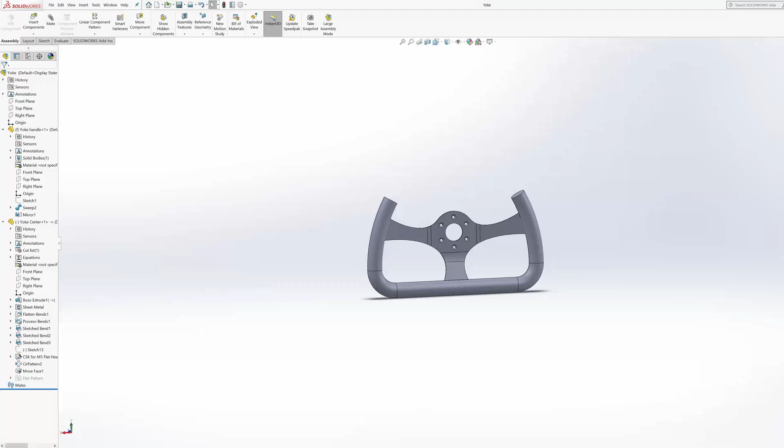First, I designed a yoke style steering wheel in CAD. I did measure the overall width that I thought I wanted, as well as a grip diameter. My initial thought was to make this out of steel tubing.

When you're drawing it up, make sure you use bends that are possible to bend. You'll see here at this corner, this has a radius that is too tight for any traditional bender. This other bend is so gradual it is also uncommon for traditional benders. So my thought was to get really thin-walled steel tubing so that I could try and bend it. You'll see that this creates problems later on.

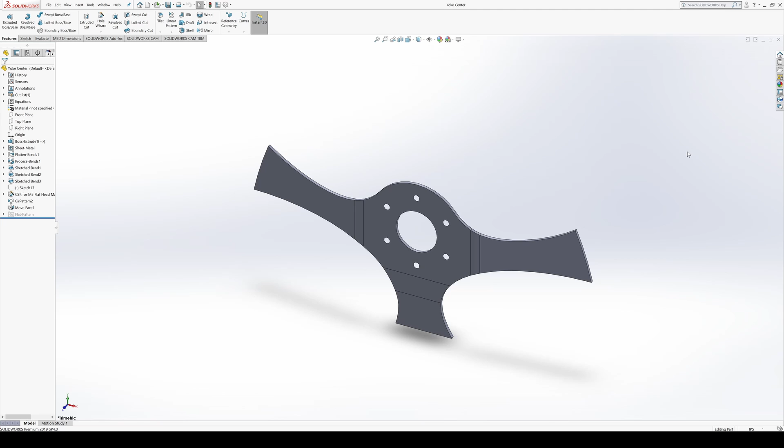The center webbing, I measured out the center hole spot as well as the screw locations to match up with my Momo style steering wheel adapter. I also put in bends. This will allow the steering wheel to project out, as many steering wheels do, and give the correct distance for things like turn signals. So I designed a part and had it made.

So we're doing some unboxing. This will be the center of the steering wheel. And I've got two, just in case I mess one up, which is likely.

All right, I'm kind of making a support block. I'm thinking that if I can hold the bar, so my first bend is gonna be right here. So if I can hold the bar steady, I'm gonna just kind of bend it against this. This will give it a little bit of support.

All right, time to try something ill-advised. So to make that bend, I tried just the lever arm and had somebody sit on the other side, and basically it's just not enough force to bend it that's not gonna work.

So my next thought is I'm gonna use these kind of like one of those 3-point bend things. So that middle one will be my bend block. These ones will support it. And then my thought is I'll just kind of lower the lift down with that bend block in place, and hopefully just the weight of the lift will kind of give enough to bend it.

Well, let's give it a try. Okay, I've got things roughly in place. I'm gonna lower the lift now and see if it'll bend at all or if we need more force. Yeah, not quite enough.

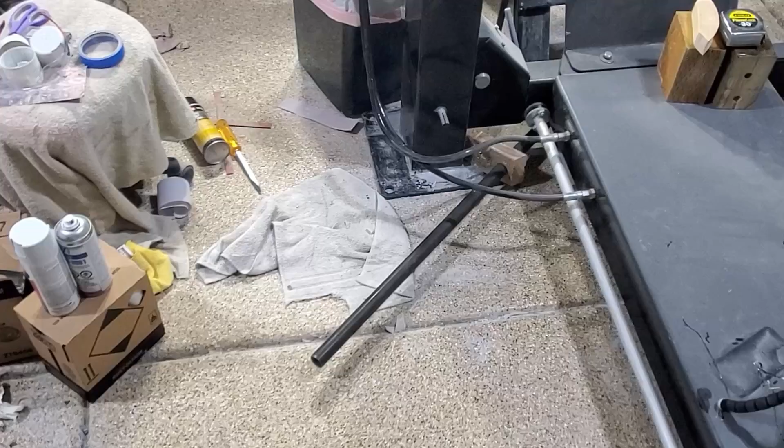Okay, this is attempt 3. I'm just using the floor and the weight of the lift to kind of keep things still, and then I'll see if I can move it or if it still kind of slips around.

Well, we just broke our wood, and even that, the column was twisting. So, I don't know, I'll keep thinking.

So this is the desired shape. And because I don't have a good way to bend this, especially these abrupt curves here, I'm gonna have to slit the tube into several sections and then kind of bend it and weld it back together. And I thought I could probably just do this gentle bend in some other fashion, but not finding that I can do that, so I think I'll just do the same thing here.

I made these paper templates to help me know what notch size I need to cut out. I then tape them onto my metal piece, and I space them so that this notch and this notch match up with my paper template here. So my plan is I will drill little holes here and big holes here, and then I will saw out and connect things.

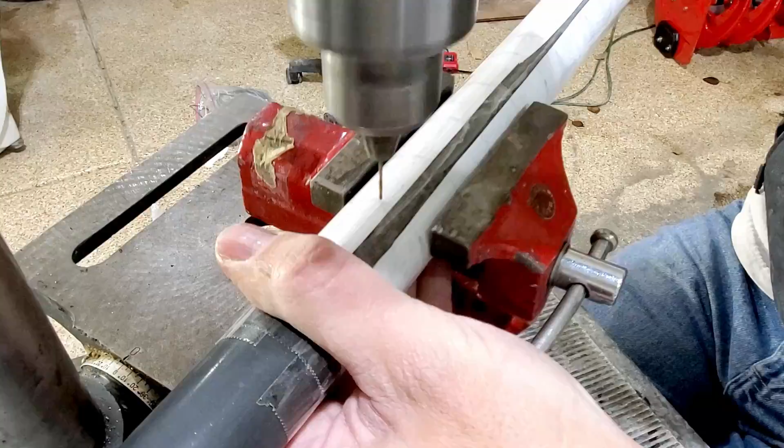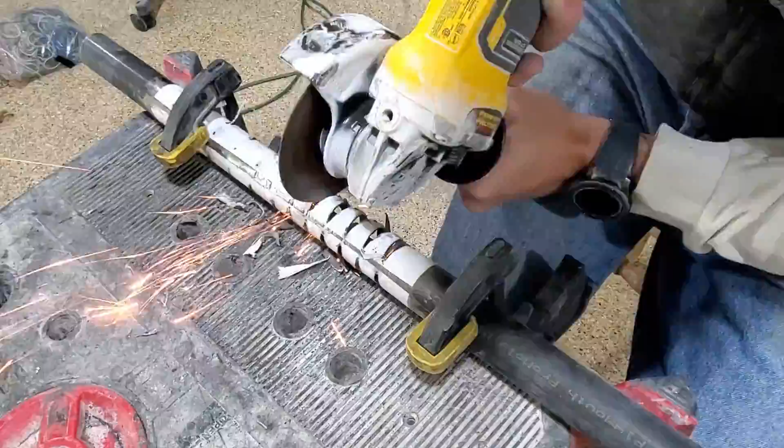Here we are with all the notches cut out. So let's see if this can go according to plan. We'll go ahead and bend this up and see if it roughly matches the shape we want.

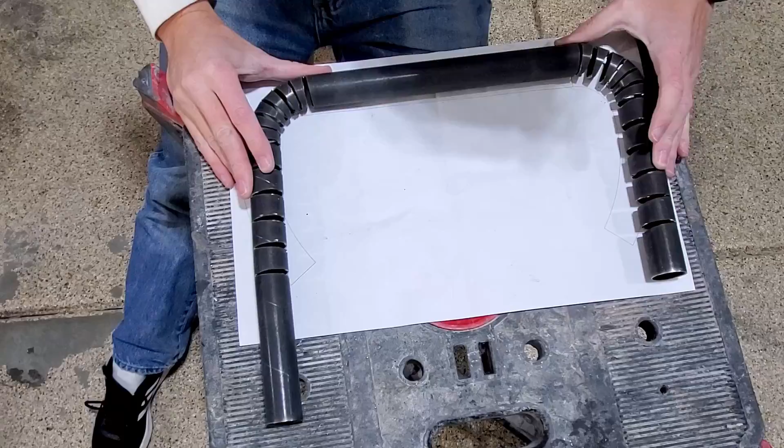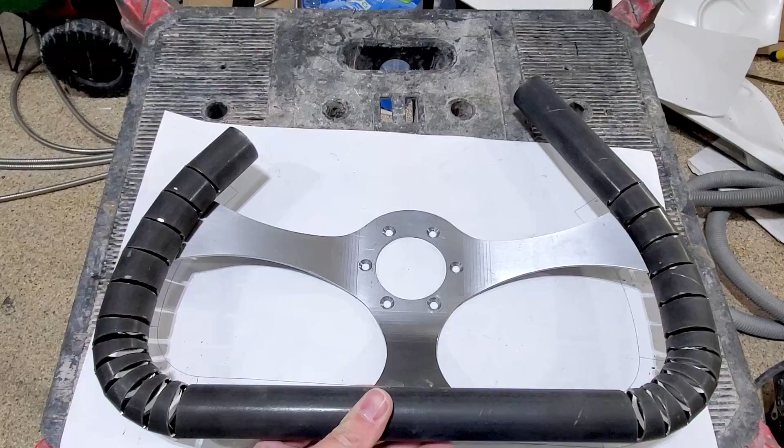So at this point, I'm realizing that my slots are too large. The reason for that is I did a 2D template onto a 3D tube. Although the template was at the desired angle, not accounting for the diameter of the tube resulted in having the slots too large. Well, it matches the pattern. The only thing is I made these slots a little larger than I desired.

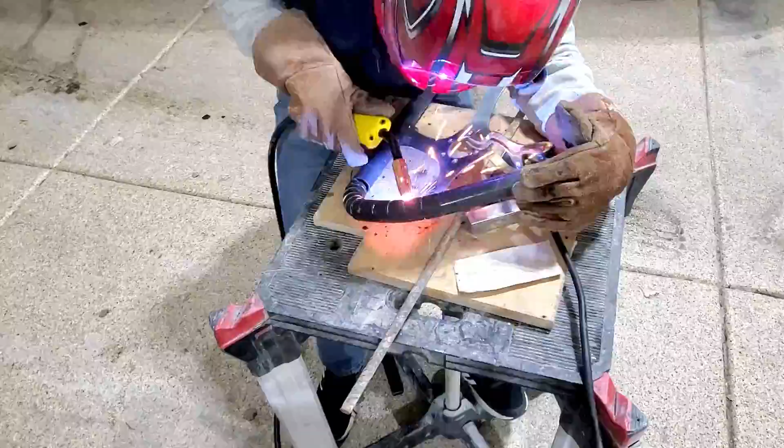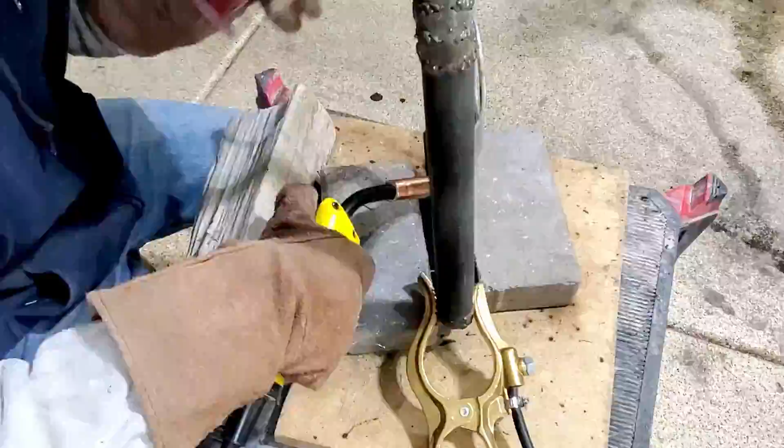So we'll see how the welding goes. This might be a test piece, but might give me some practice on filling up gaps. So remember at the beginning of the video where I said thin wall tubing would be a problem later on? Yeah, trying to weld thin wall tubing, especially where you got large gaps, is not easy.

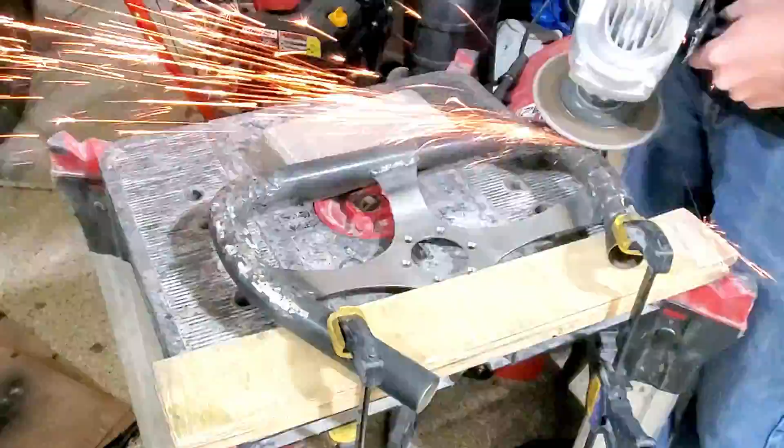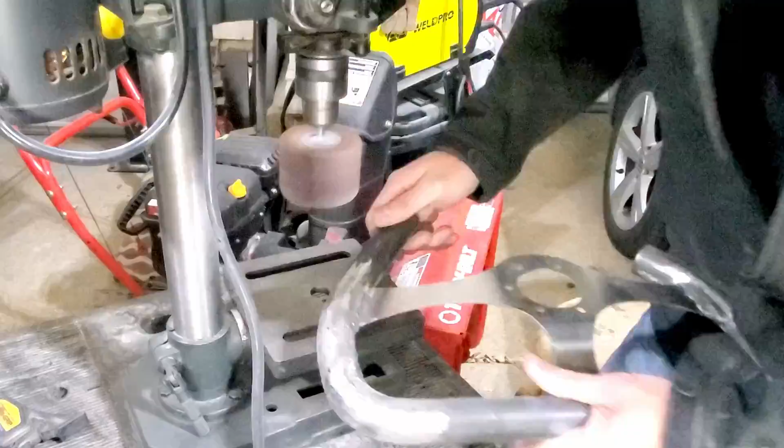However, I was able to finally get things welded together. I tried several different sanding methods, kind of flap disc, Dremel, a sanding wheel and the drill press. I've got this cleaned up, I think, as much as I can. I need to chop off that one at the same place as this one, and I'll probably do a couple things to get this ready for paint.

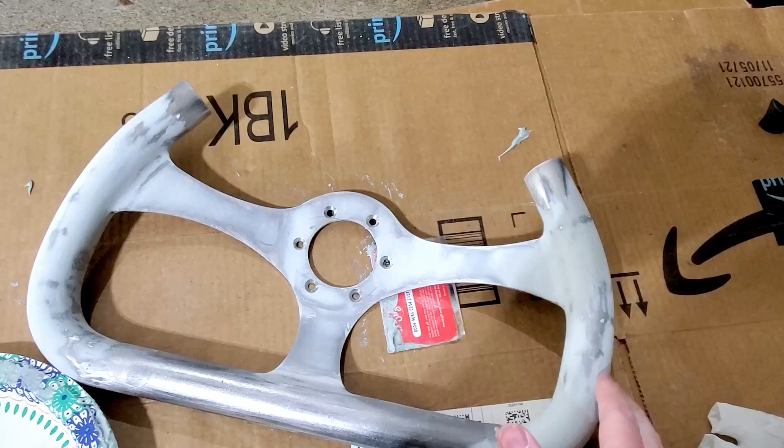Here it is after some sanding. So I think this really helps just smooth it out. Again, this will all be under a wrap, but I just wanted to get it looking nice before we paint it.

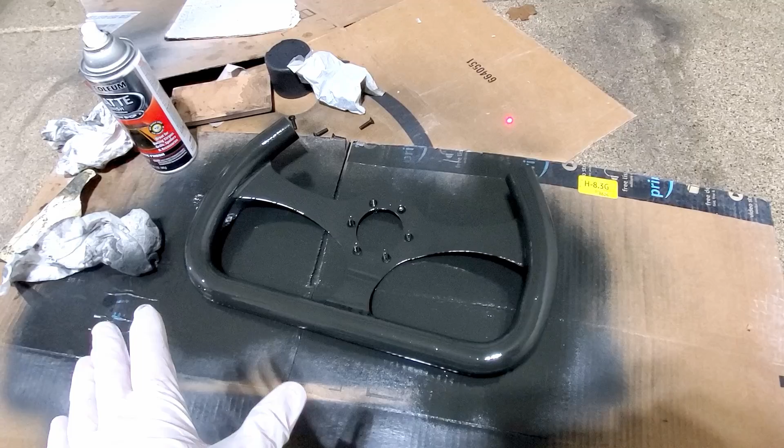We got it painted, so we'll let this cure up, and then I also got to put on a clear coat, but then I'm going to start attaching the wrap. So I've got a wrap for this.

I ordered some end caps that go on here. So I'll probably put some adhesive or epoxy on there, put those in, and that will complete that. I also have some wrap material, so we'll start working on that.

I did what they call baseball stitch, and here those are kind of some false stitches just wrapped around. So got this all wrapped and tight. Next I'll figure out how to terminate these and put on those caps.

All right, I'm getting ready to put these end caps on. I'm just going to put a little dab of this black adhesive sealant, so I'll keep them in place. And there might be just a little bit of a transition, so I might smear some around to have it be an even transition.

Let's turn in the wheels. And great view of the gauge cluster. I'm really liking this. I'll have to give it a drive. So this is the old steering wheel, new steering wheel. And they're quick release, so I can just swap them back and forth.